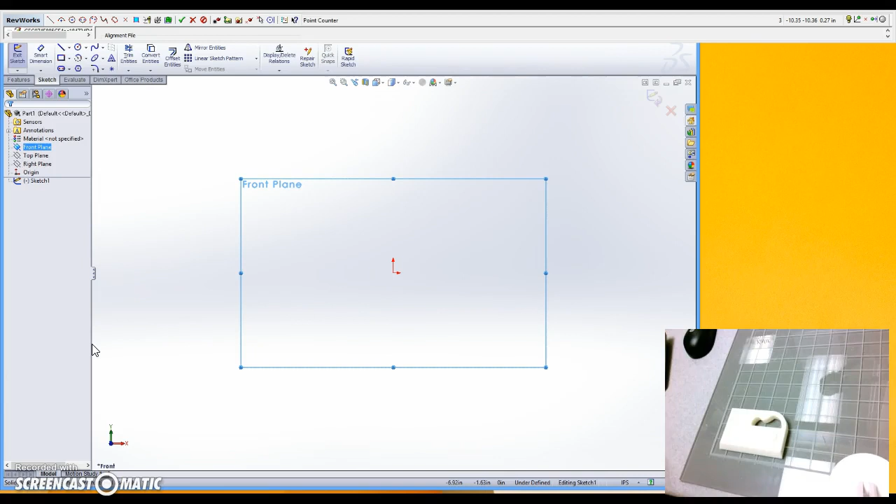Now that we've got our Microscribe all set up, we're ready to start trying to recreate our first part here. We have the part set up on the camera, and it's just a random part that we've made to work on skills using the Microscribe, doing different things like extruded cuts, lofts, possibly extruded boss bases, domes, and so on.

So what we're going to start off doing is really thinking about how we would build this part. As we go through and recreate this part using the Microscribe, we want to work through the same process we would do if we were actually building it. The more familiar you become with SolidWorks, the easier this will become.

So basically the first thing we're looking at with our part is that it would generally be a rectangular shape. So what we're going to do is use the Microscribe to get a rectangle that's approximately that same size.

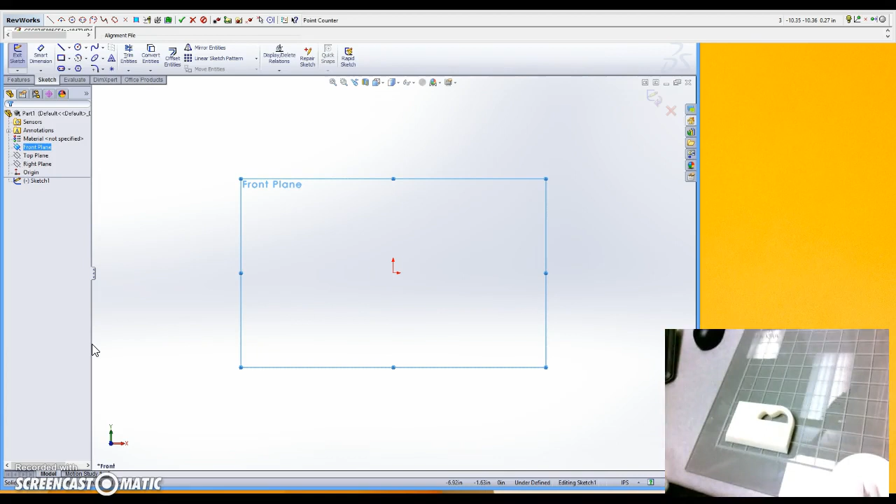So we'll take our Microscribe, and I've got the arm moved over here. What we're going to do is go into our RevWorks, and I'll pull down this menu to make it a little easier to deal with. We're going to click right here on Digitize a Rectangle, and it tells us to enter 5 points to digitize that rectangle.

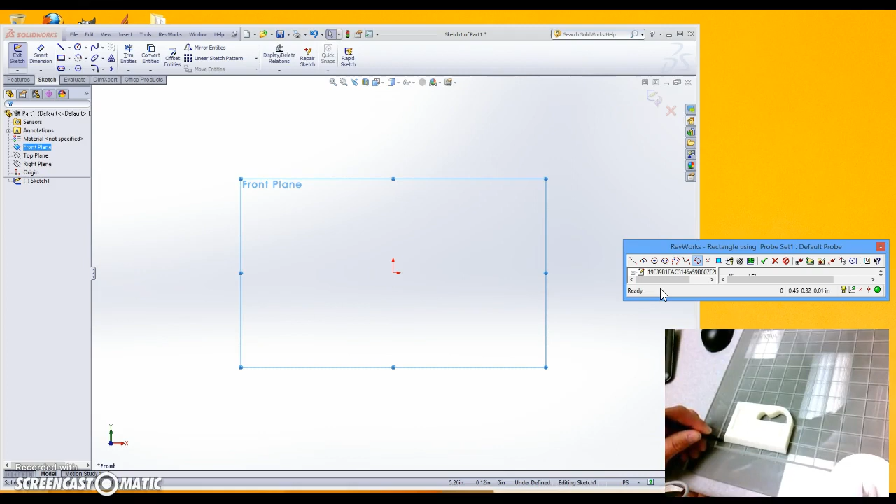Those points will start at the corner of your base. Hold the digitizer, you don't need tons of pressure. Hold it at the corner of the base, press. Go to the opposite corner on that same side and click. Then do the middle of each of the other sides.

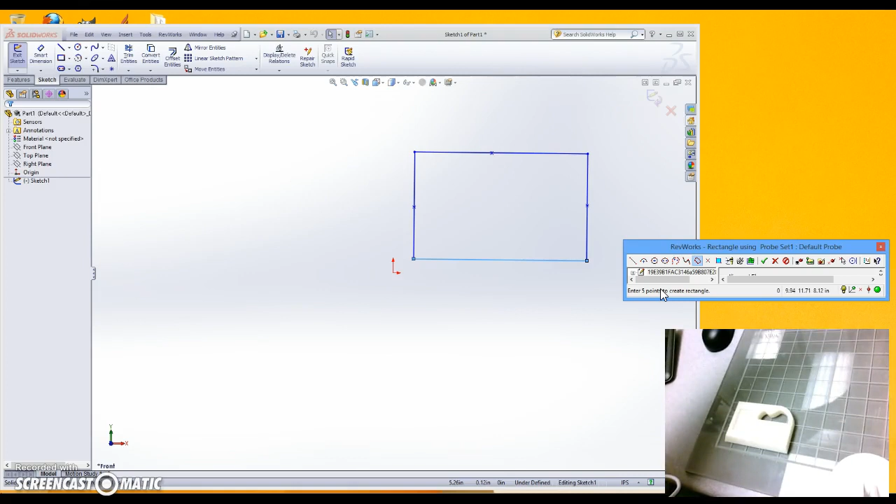And as you see on the screen, it has drawn a rectangle for us. Now the only thing we want to do yet with our rectangle, before we continue on to some of the other features, is go ahead in our sketch and add some relations.

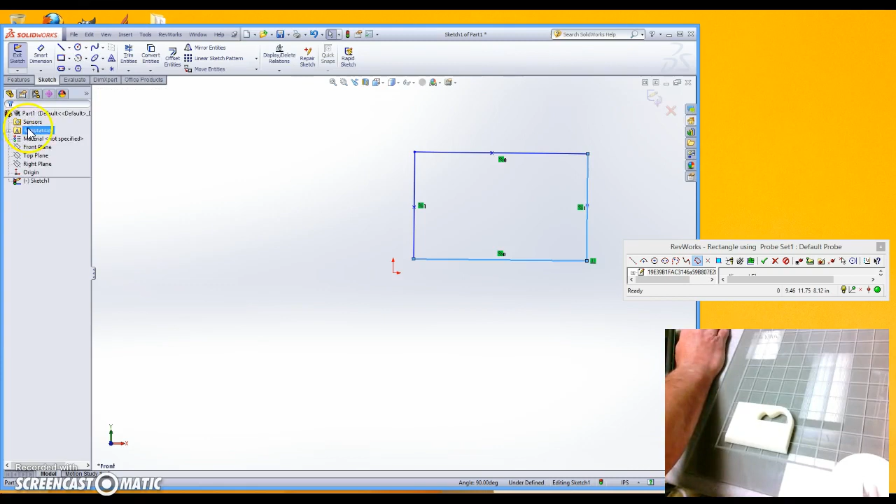So the first thing I'm going to do is set my two bases - I'll push Control and click so it holds two sides here - and set those to be parallel. Then I'll do my opposite two sides, Control click so they're both selected, and click parallel. Then I'll click the base and one of the sides and set those to be perpendicular, which makes sure I have a nice square rectangle in this case.

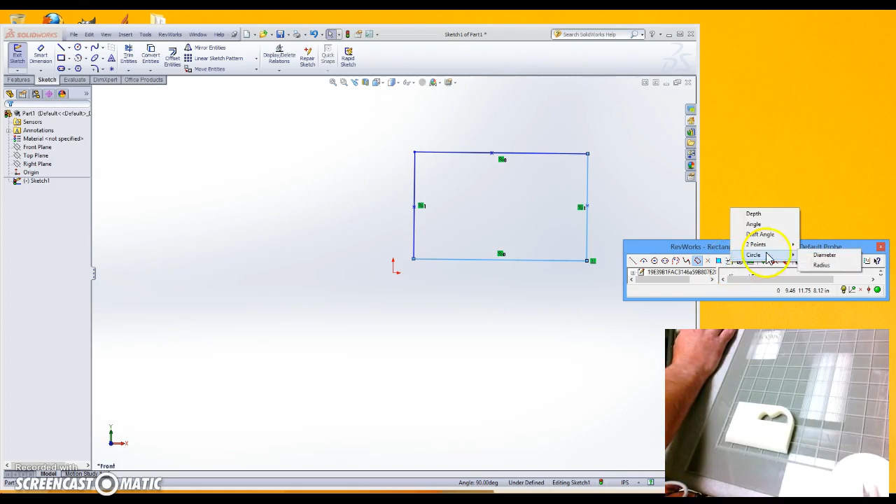Okay, now what we can go ahead and do is put in our radius for this curve section here. So in this case, we'll go up to our RevWorks menu.

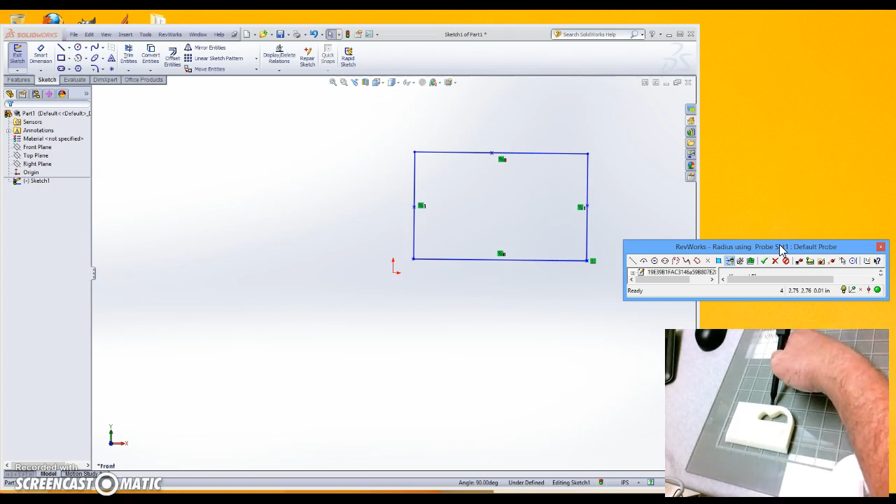We're going to go to our calipers, right click on the calipers, go to circle, and click on radius. So what we need to do is measure several points around the radius of our circle. I start on the side, click, click, click, click - the more points you get, the more accurate it's going to be. That puts a value, and when I click enter it gives me a radius value: 1.23 inches stored to clipboard.

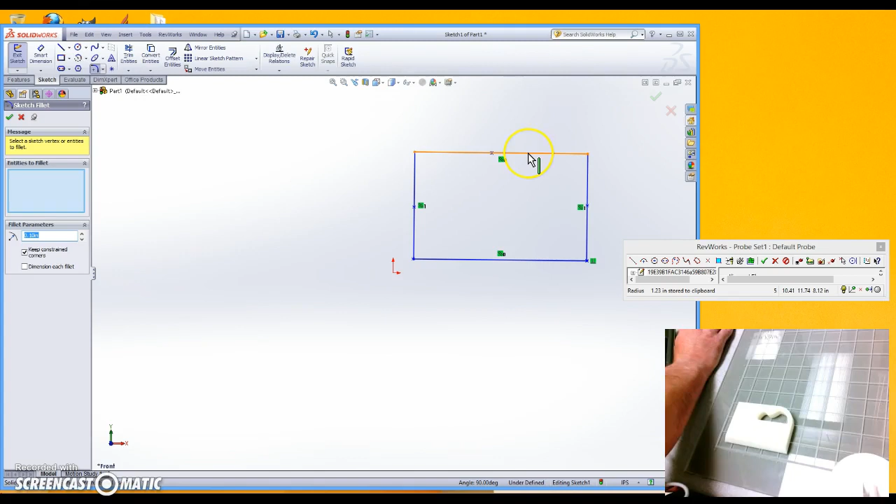So in order to get that radius on the circle, we're going to go to fillet, our sketch fillet, and click those two sides of our rectangle where the fillet's going to be. Then in our fillet parameters, we'll click Control V or just type in that value and click OK. And now we have that shape, we have that radius here.

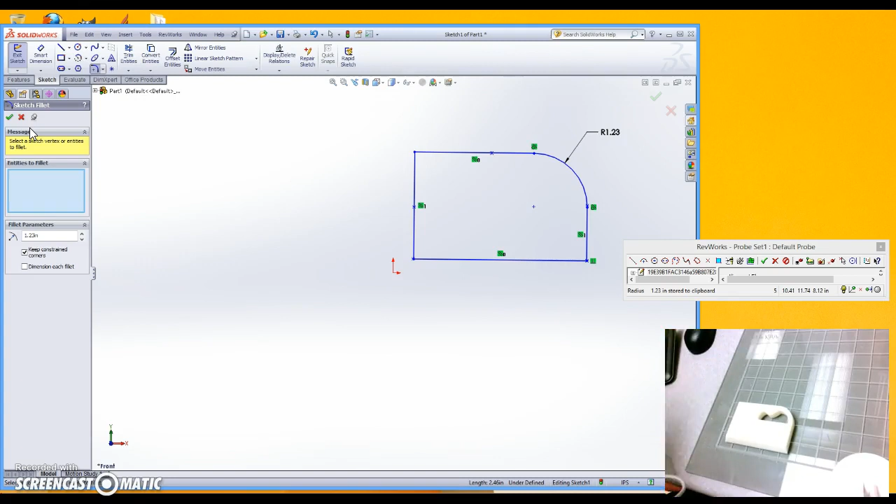Okay, the next thing we can do is an extrude boss base to make the height of our object. So before I do that, I'm going to go to the calipers and go to 2 points and do delta Z, because that's going to measure our height.

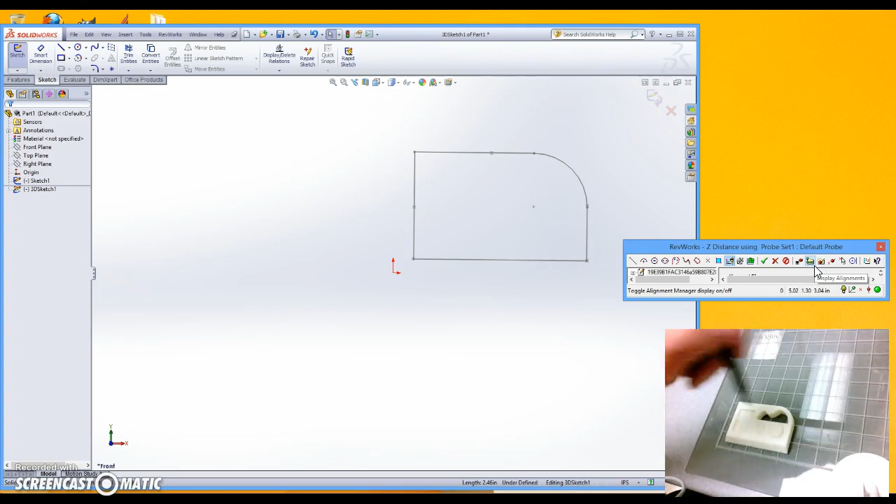So we need to measure two points, and we're going to measure from our base - it doesn't matter which side you do. We put our point on the base of our plate, press OK, and the top of our surface, press OK. That gives us a height value that we're going to use: 0.51 inches has been stored to clipboard.

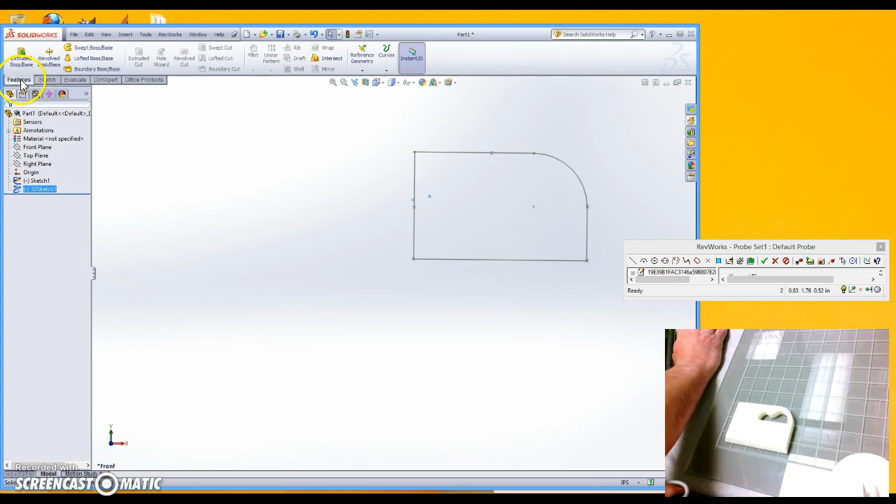So we can make sure our sketch is selected, exit our sketch, and go to Features. Again, I'm going to select my sketch so it's all highlighted here. Extruded boss base. And under the depth dimensions, it's already highlighted - Control V to get 0.51 inches, and click OK.

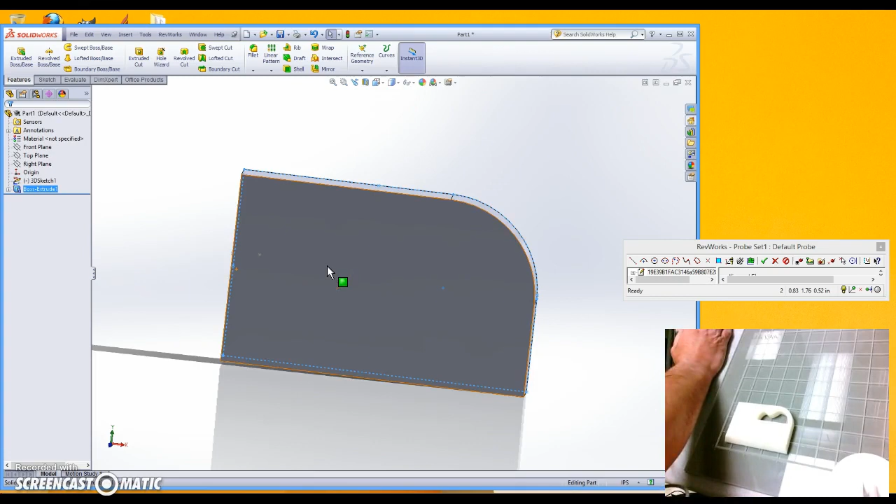And there is my object, so far it's been extruded. Okay, that will end this video. The next video will go into doing some of the cuts and making some of the other features on our part.